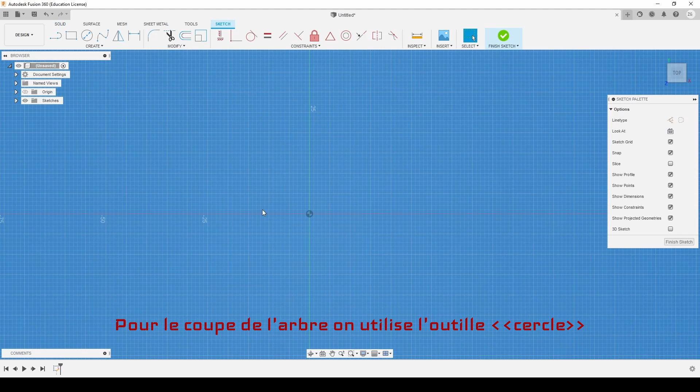To create a two-dimensional cross section, we create a sketch and choose our plane. Let's choose the XY plane. The shaft cross section is just a circle, so we select the circle tool, go to the middle, and then do the radius.

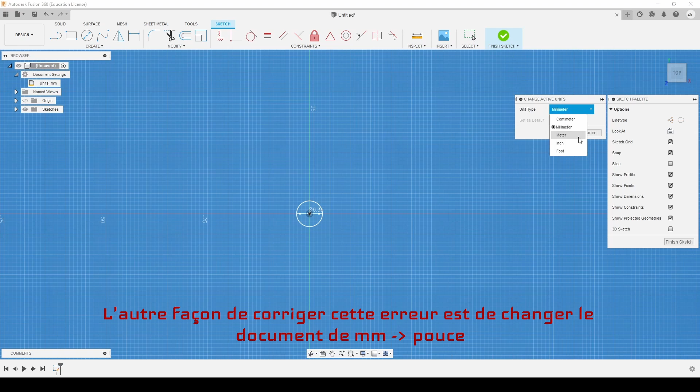Now unfortunately, I just noticed the document is in millimeters. To bypass this, you can just multiply by your value and then type 'inch', and it recognizes inch and will convert it to inches. The other way to do this is to just change the document settings here and go to inch, and now your file is in inches.

So let me finish the sketch, and now let's give it a height. To give it a height, you just hit the extrude tool up here, and then do 1/2 an inch, or whatever height you want it to be, and now you have the shaft.

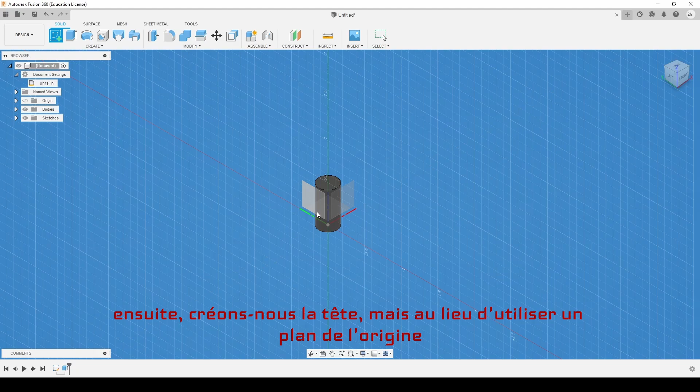Now let's create the head. Instead of using one of the planes from the origin for our sketch, we're going to use the face here. What this does is that if we decide to change the length of the shaft, the head will move with the end of the shaft, which is very convenient if we ever need to change the height.

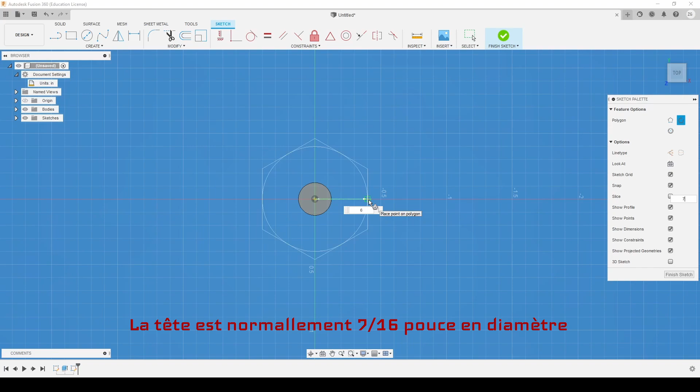So let's create the head. The head is a polygon, so we're going to use the circumscribed polygon, because that's how the measurements for the head are normally done. The head is 7/16 of an inch normally, so 7 divided by 16. But since this is a diameter, we have to divide that by 2 to get the radius. And now we have a 7/16 diameter hex head.

And then, same as the shaft, we just extrude it. I believe it's 0.15. And now we have our 1/4-20 hex head bolt.